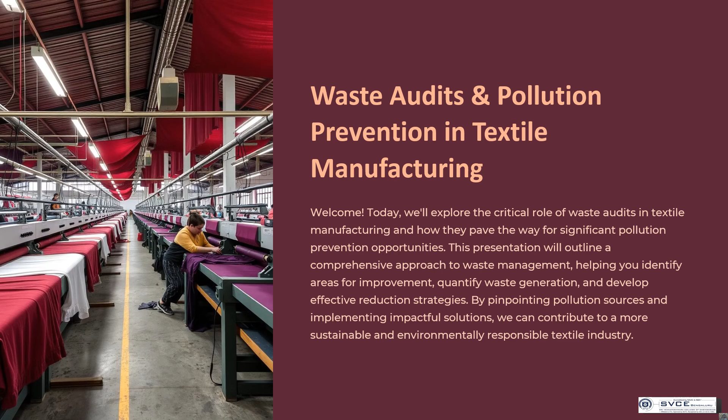Why do waste audits matter in textile manufacturing? Because of reduced cost and environmental sustainability.

In reduced cost, waste audits help identify areas of inefficiency and waste, leading to cost savings through material optimization, process improvements, and reduced disposal fees. It's about maximizing resource utilization and minimizing operational expenses.

Moving on to environmental sustainability, by understanding the waste stream, manufacturers can implement strategies to reduce their environmental impact. This can include recycling, composting, and sourcing sustainable materials, contributing to a greener textile industry.

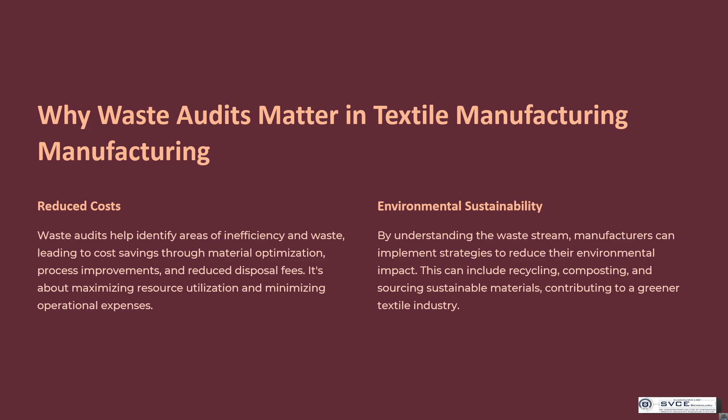In this slide, we will understand the textile waste stream. In the first step, we will see raw materials processing - waste generated during the processing of raw materials such as cotton, wool, and synthetic fibers. This can include fibers, dust, and scraps.

Moving on to the second step, that is manufacturing - waste generated during the production of textiles, such as fabric scraps and packaging materials.

Moving on to the third step, distribution and retail - waste generated during the transportation, storage, and sales of textiles. This can include damaged goods, unsold merchandise, and packaging waste.

The last step is end of life, that is waste generated at the end of the garment's life, such as worn out clothing, discarded textiles, and landfill waste.

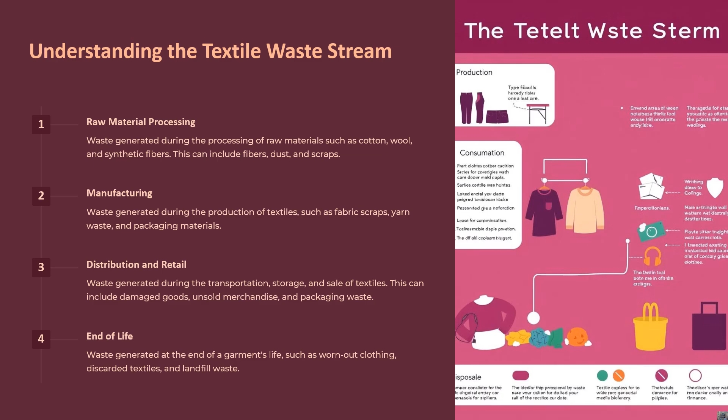Moving on to the next part of the presentation, identifying common waste types and sources. First, fabric scraps - excess fabric from cutting, sewing, and other manufacturing processes. These scraps are often sorted and reused for other applications.

Next is dye waste, that is wastewater generated from dyeing processes. This waste often contains harmful chemicals and can contribute to water pollution if not properly treated.

Next is packaging waste, that is waste from packaging materials used to transport and store textiles. This can include cardboard boxes, plastic bags, and other packaging materials.

End of life textiles include discarded clothing and other textiles. This waste often ends up in landfills where it takes hundreds of years to decompose.

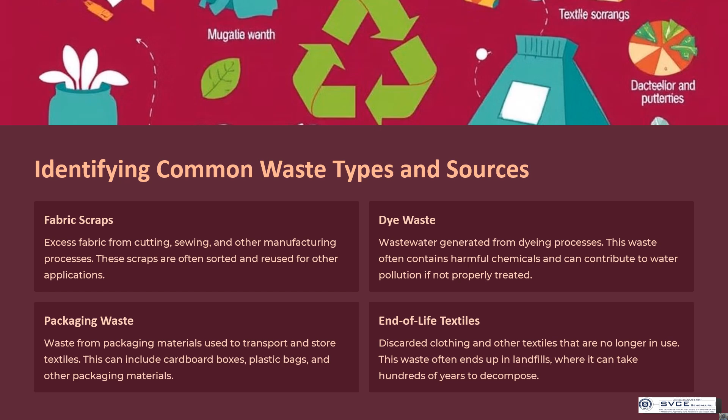Conducting an effective waste audit: first, define scope. We have to clearly define the scope of the audit, including the time period, location, and the waste types to be included.

Collection of data - gather information about waste generation types and sources. This can involve weighing, measuring, and sorting the waste according to their types. Next is analyze findings - analyze the data to identify patterns, trends, and other areas for improvement. This can involve calculating waste generation rates and identifying key waste sources.

Next is document result - prepare a detailed audit finding, which will be helpful for the recommendation.

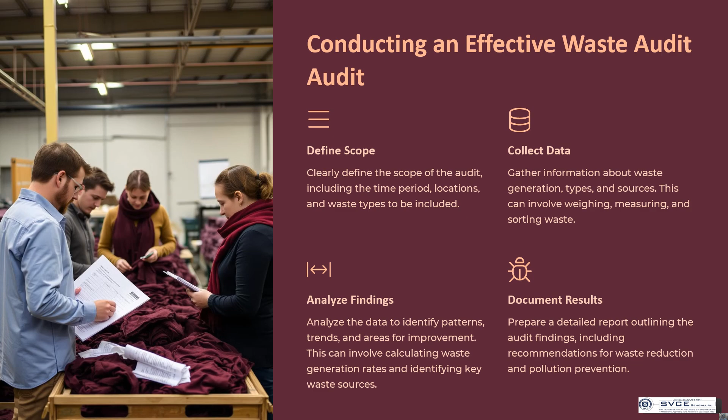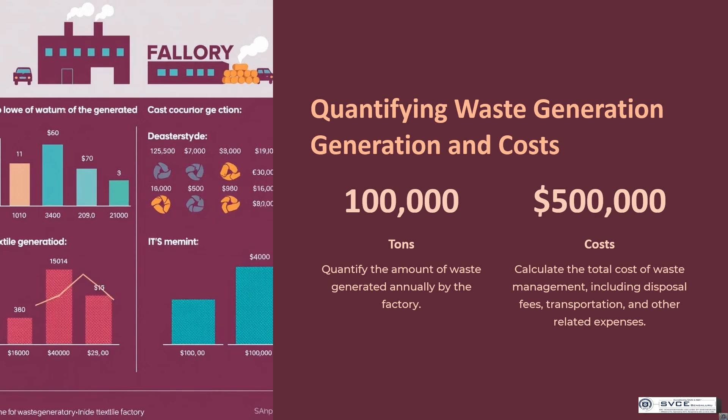Here is quantifying waste generation and cost. You can note down this slide - tons and cost: quantify the amount of waste generated annually by the factory and calculate the total cost of waste management, including disposal fees, transportation, and other related costs.

Pinpointing pollution prevention opportunities. The first step is water treatment - implement a wastewater treatment system to reduce the discharge of harmful chemicals and pollutants into the environment. The second is energy efficiency - reduce energy consumption through process optimization, equipment upgrades, and the use of renewable energy sources.

And the next is material recycling - establish recycling programs to divert waste from landfills and reuse them for other application resources.

Treatment and efficiency is the main part of this slide - water treatment, energy efficiency, and material recycling.

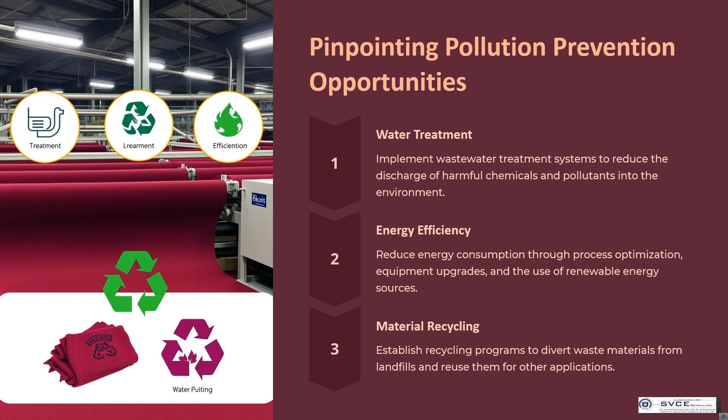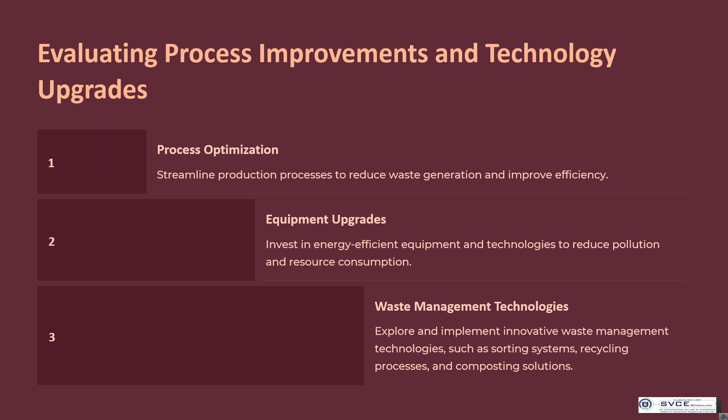In waste management technologies, explore and implement innovative waste management technologies such as sorting systems and composting solutions.